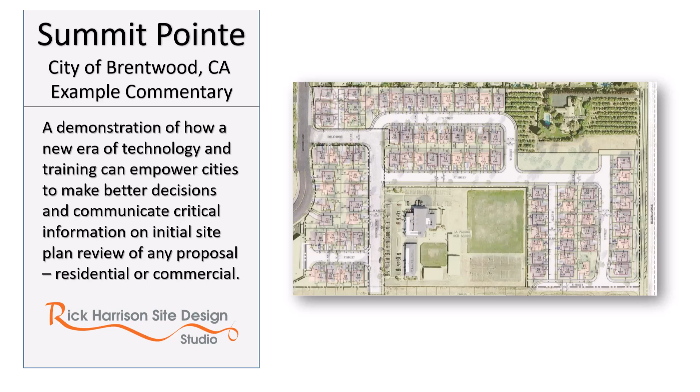This presentation will demonstrate the advantages of a new solution for cities. It's a combination of new technologies and training for the City Council, Planning Commission, and staff, which represents a new era of communication that will help all stakeholders involved in the submittal and approval process.

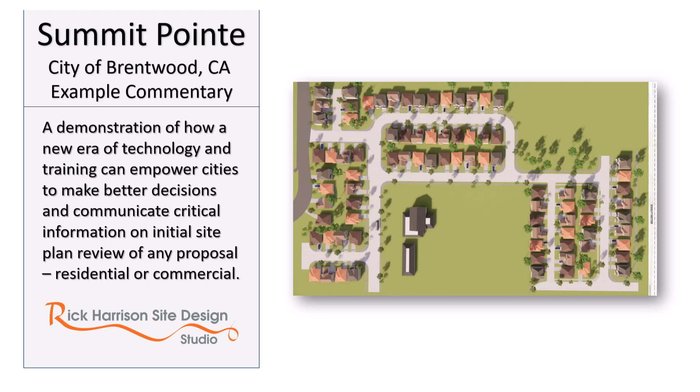In this example, we use an actual presentation that was made to the City of Brentwood, California back in 2016. There are a few assumptions that can be made in the process from initial concept submittal to approval.

The people who are approving the development, the city planning commissioners as well as the city council, are only educated on the meaning of the regulations as directed by the city planner. Most cities in this country use regulations that have their basis from the early 1930s. The city staff could possibly have their own agenda, for example, be members of the Congress of New Urbanism, for which planning is a social engineering exercise.

The same city staff could be progressive and forward-thinking, or they may be overly conservative and adverse to change. We are not aware of any city in the nation that makes sure the council and planning commissioners are educated and up to date on the latest technologies and methods available to design and build neighborhoods in their city.

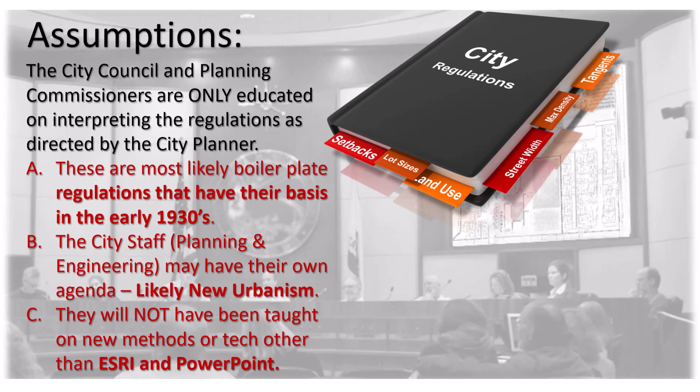Beyond these assumptions is the fact that most ordinances begin with a purpose and intent. Unfortunately, most use boilerplated regulations that have their basis in almost a century ago. Everything that follows this purpose and intent is supposed to achieve its goals. What follows? A set of minimum standards which can only guarantee minimal development.

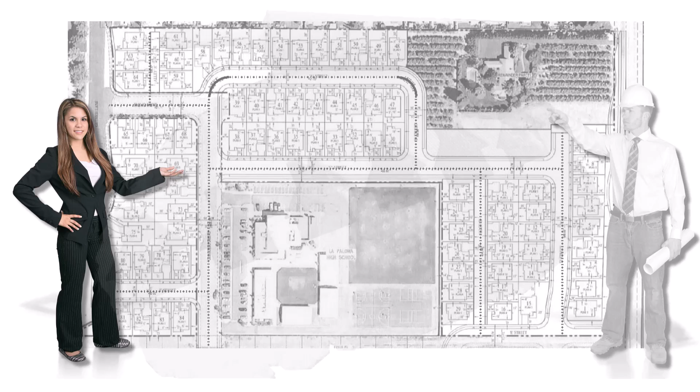The developer is going to hire the local civil engineering consulting firm as the land planner for their site. They will assume that the consultant will give them the best possible plan. They're probably not fully aware that the land plan is the basis of their business plan, and moving forward has the most influence on their success or failure.

The consultant, to get the quickest approvals, is more than likely to religiously follow every minimum and try to squeeze in every unit into the site to please their client. The land plan is not where the consultant is making their money. It is in the extremely lucrative engineering and land surveying fees.

In our 56 years of serving the land development industry, we have come to realize one truth. Generally, the city council and planning commissioners are not very impressed with most of the developments that they must judge upon. They feel totally powerless in the process to enact change. This new system will provide the power they so desperately want.

This is our solution. The first thing that we do is convert the CAD data, which will not be spatial, to the Precision Land Mentor software that we developed to properly analyze any submittal. In this example, you see the street center line length is 3,912 linear feet. This would mean very little to anyone at this point of the presentation.

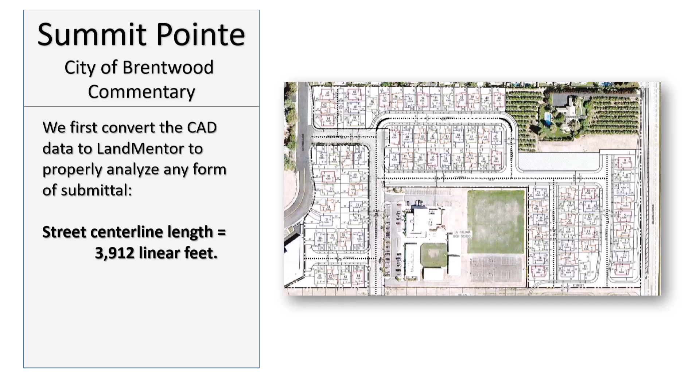We then run an analysis of the paved surface area of public improvements. Because Land Mentor is an intelligent spatial analytical technology, we're able to develop these charts instantly. Still, few would understand why this is important.

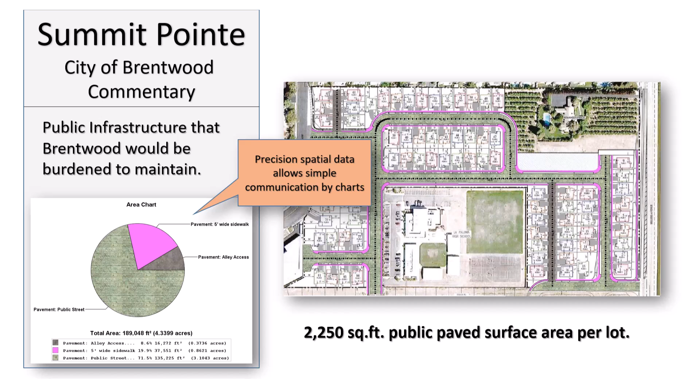This next slide also includes driveways. On this next slide, we show the surface area of the footprint of every home. Then we compare it to the total paved area per home and show that for every 1 square foot of footprint of the home, there is a total of 1.53 square feet of paved surface area to serve it. And again, at this stage, few would understand the importance of this.

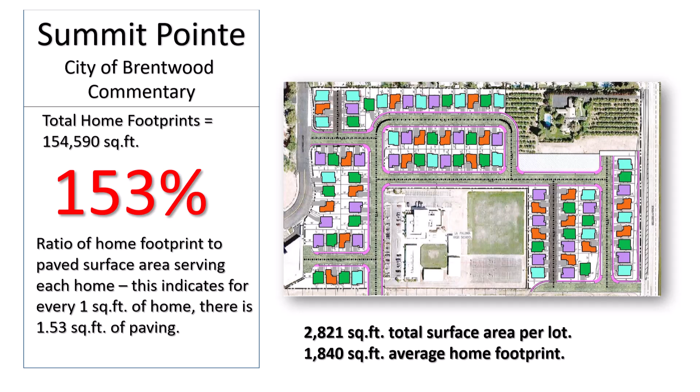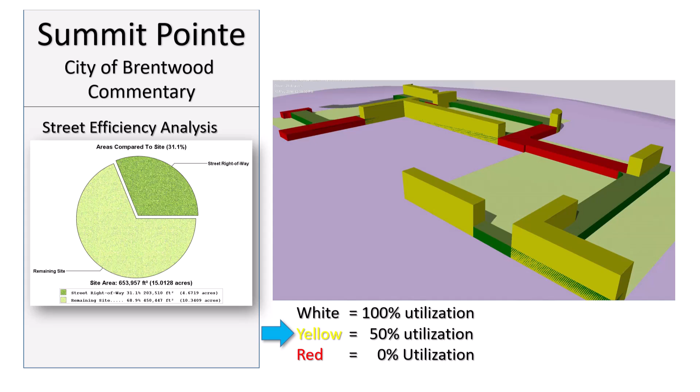This next slide shows in yellow and in 3D streets that are only fronted on one side, and in red streets that have no lots fronting it. One-sided frontage is 50% waste and no frontage is 100% waste. At this stage of feedback, the developer should be shocked at the inefficiency of what they just submitted.

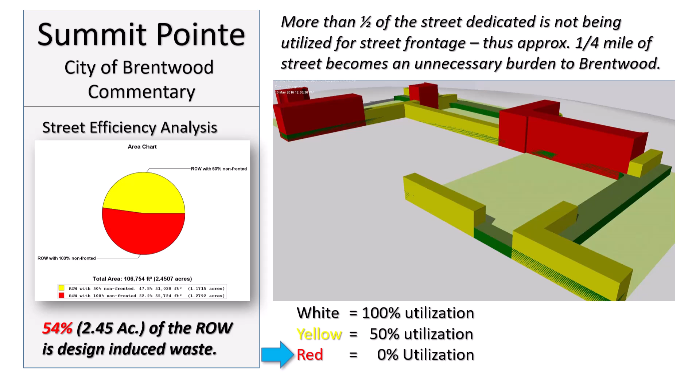Again, using charts, we start communicating the waste of this initial proposal at the concept plan stage. A linear foot of street includes sidewalk and utility mains. Conservatively, in California, streets should be about $1,500 a linear foot. There are 84 lots being proposed, so this waste can be translated into increasing the cost per lot by $18,000. At this point, the submitter, being the developer, should realize that maybe this is not the best proposal to move forward with.

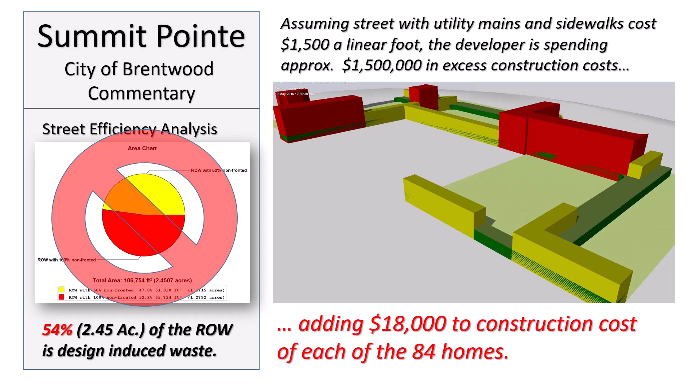This analysis would include many more aspects of the proposal. For example, in this slide we have analyzed the site from a street flow analysis—in other words, how much time and energy it would take simply to get home or leave the development to a destination. Cars do not go around corners at 25 miles an hour; they must slow down and speed up. There are a lot of roadblocks simply to traverse the neighborhood. This is just one example of many to consider on any submittal.

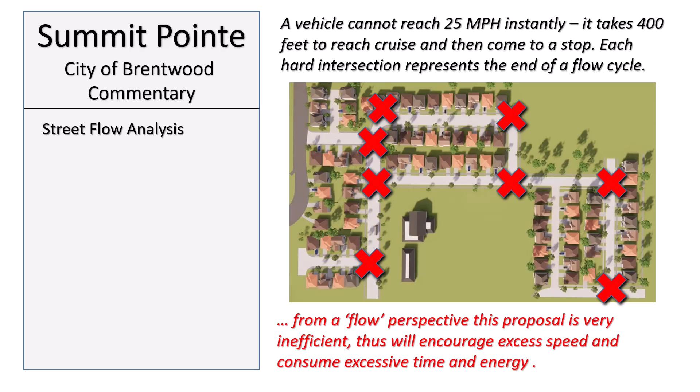On the purpose of the City of Brentwood Ordinance, Item 3 is of importance. It says to encourage the provision of attractive and stimulating surroundings that will make Brentwood's residential areas enjoyable places to live. It is this condition that gives the Planning Commission and the Council some power to reject a development.

Let's take a look at this development, not by a 2D plan, but by a 3D presentation of which we quickly replicated the look of the actual proposed homes. As we enter the development, we look directly into the side of a home. See how each home was squeezed into the smallest possible lot, perfectly aligned parallel to the curb with very short setbacks? If you were on the City Council or Planning Commission, would you find this very attractive or stimulating? Let's take a few minutes to tour the development before we get on to the next slide.

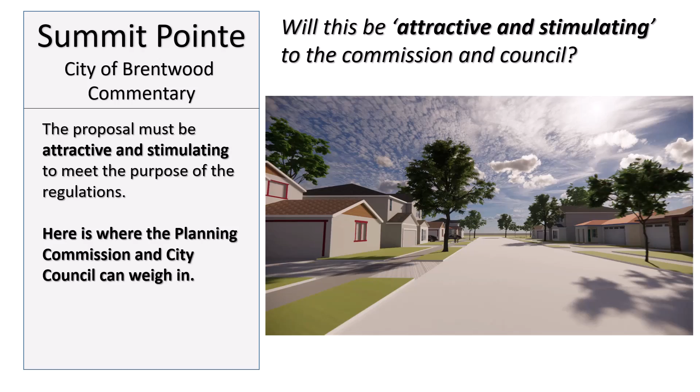As part of this new system, it's not just about what we've demonstrated here, but taking our 56 years of experience in this business to help cities go beyond expectations. In doing so, we would suggest changes in the regulations in such a way that gives the city more control over their growth. For example, we would suggest the following in the purpose: creating more safety and connectivity by separation of pedestrian and vehicular systems.

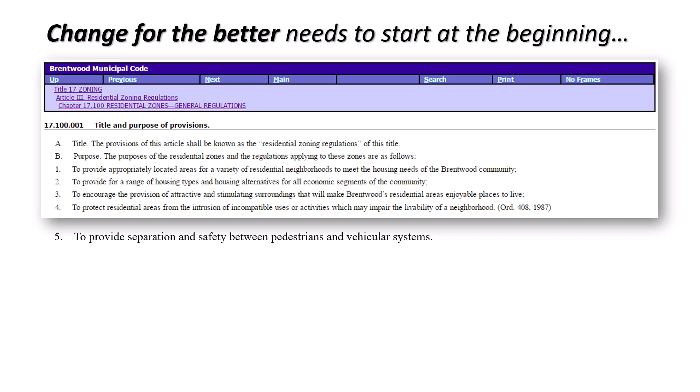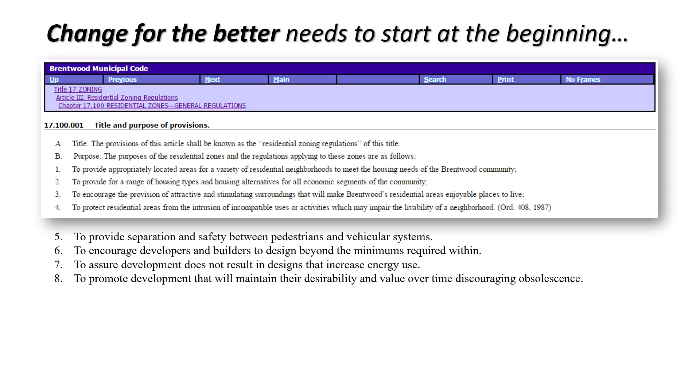The purpose should also encourage developers and builders to go beyond the minimums. Assure that development does not create energy-inefficient design. Promote development that maintains its value over a long time period. Development that encourages a stroll over a drive. Provide housing that minimizes monotony while also increasing the human feel of space. Provide regulations that encourage a higher standard than surrounding communities, attracting the best developers to build in Brentwood. These are just a few of the many suggestions that we would make.

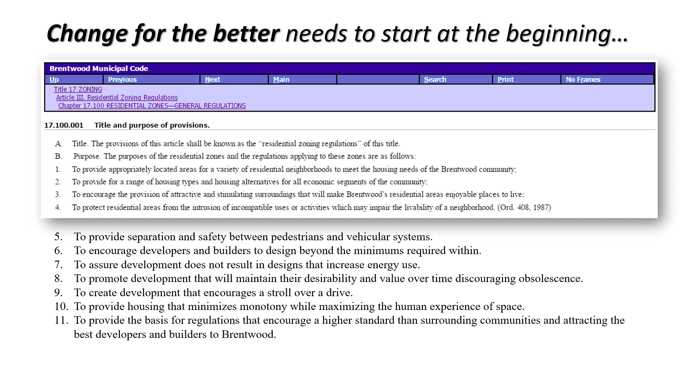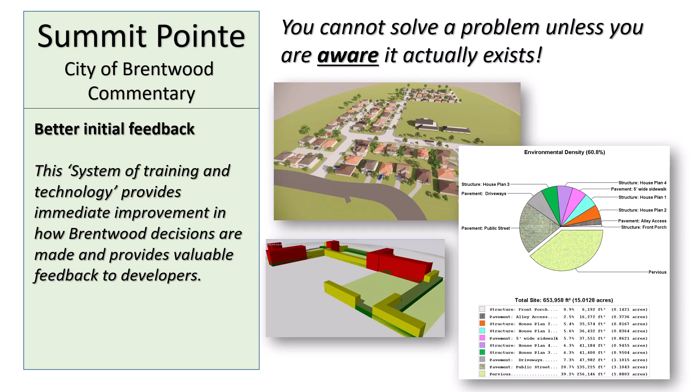It is very important to realize you can't solve a problem unless you are aware that that problem actually exists. This system provides that awareness. To accomplish this, we developed one holistic solution. It is actually very easy to teach Planning Commission, council members, and staff how to recognize waste in any submittal.

For example, here is a development in Brentwood. You see the yellow streets fronted only one side and the red streets with no frontage. We also show a cul-de-sac that would not be needed to achieve the same density. We go through a series of exercises to train stakeholders and staff.

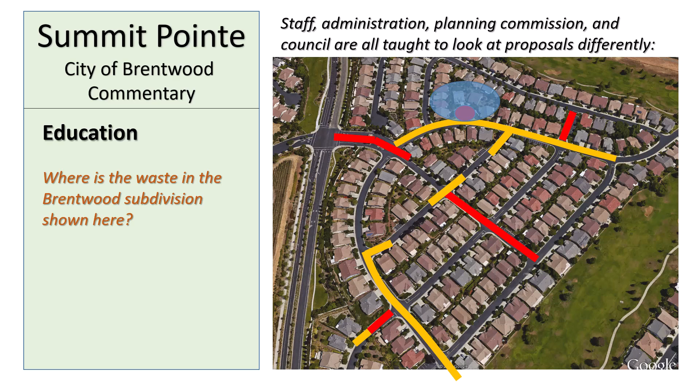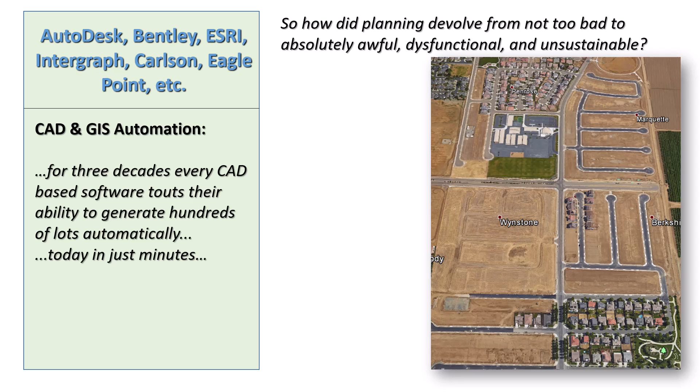The major players in the software industry—Autodesk, Bentley, and ESRI—who have made multiple billions of dollars annually, none have even come close to providing a solution as we have demonstrated here. And thus, the cycle that repeats itself around the nation every month, city after city, in the estimated 35,000 cities.

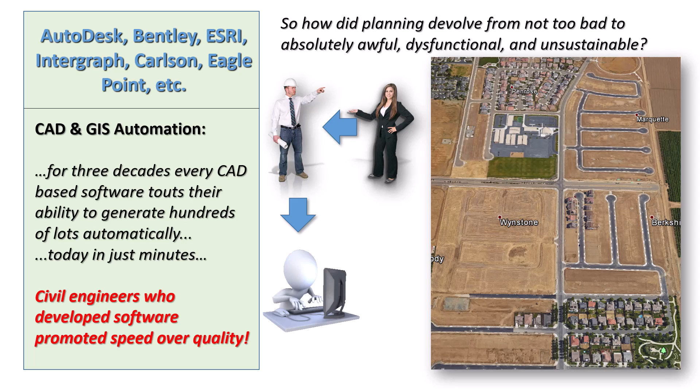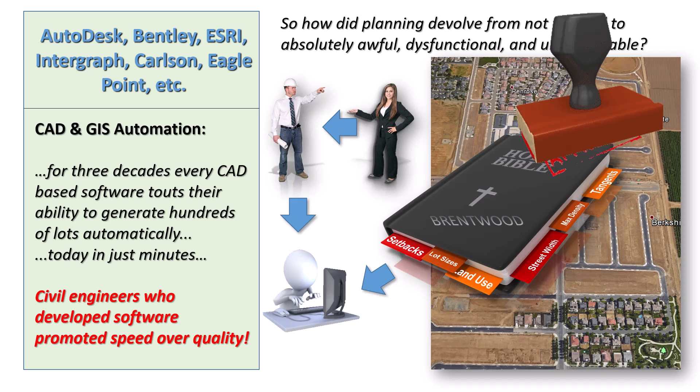The developer hires the civil engineer, who is likely to have a technician automate the design of a subdivision for submittal for approval. Without providing constructive feedback that could be translated in the form of financial consequences to the developer, nothing will ever change. In other words, as in this very small example development, we have communicated to the developer they are about to take a $1.5 million loss should they consider moving forward with this plan.

We have highlighted where the waste is so that the consultant could go back to the drawing board and eliminate as much as possible. They may not be talented enough to create a better plan, especially if they are totally dependent on an automatic subdividing software package. In this case, the developer is likely to find a more talented land planning company to do the design. Of course, they could move forward with the design as is, and the city would be powerless to reject the plan other than it's not very stimulating.

This is a system which is a totally new solution for cities. What we have demonstrated is a very small part of the capability of this solution. It's a holistic technology that merges land surveying, civil engineering, advanced land planning, and architecture related to the site in one quick-to-learn and easy-to-use system.

It would only take a half-day commitment for the administration, city council, and planning commission to learn how to use this system. For the city staff, if they wanted to learn the entire system, it would take no more than a week. Included in this time would be suggestions of change to the existing regulations to make improvements in the submittal and approval process. We touched on a few of these changes in this presentation.

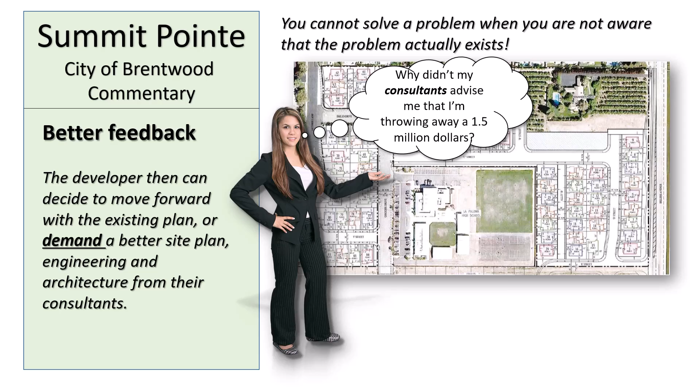In order to assure smooth operation, we would include some basic hardware along with the software and training, including a VR-capable computer and headset. The projected initial cost to the city would be around $60,000. All the city would have to do is recapture 40 linear feet of street at $1,500 a linear foot to pay for the entire system. We just demonstrated a quarter mile less public street on one small submittal.

On this example, to convert the initial data, replicate the client's proposed homes in 3D, build the presentation, and provide a file that would run like a video game supporting VR headsets, for the 84 lots proposed would be approximately $50 a lot. This fee could easily be built into the submittal cost. Unlike most of the submittal fees that land developers typically complain about, the constructive feedback at initial submittal stage would be invaluable. Even if they didn't want to make any changes, they would end up with an interactive 3D file that they can use in their marketing.